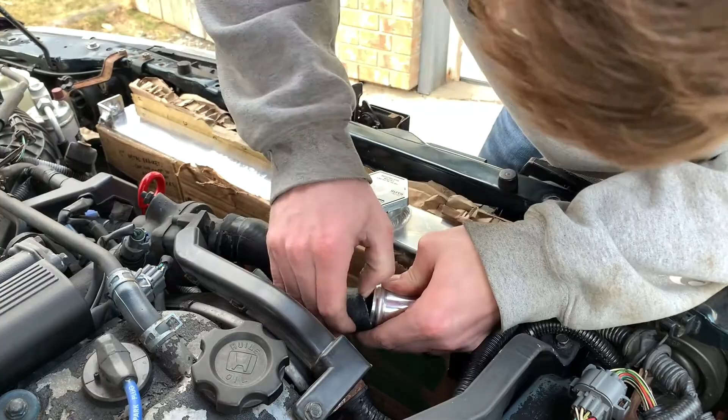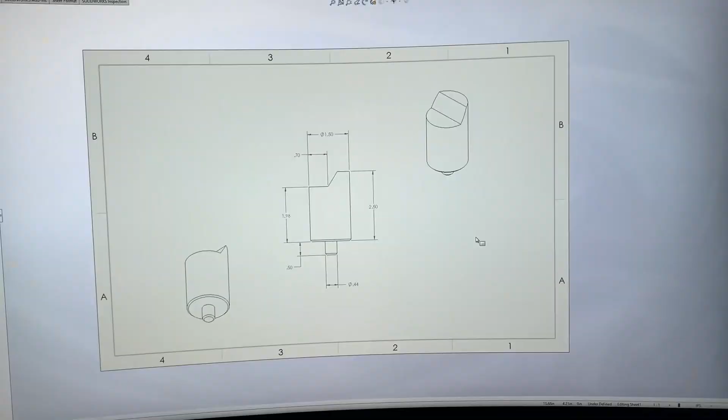Basically I have to relocate these mounting pins, and this needs to be spaced. So I'm going to try and draw up some spacers that will get welded onto here, and then we'll just mill those down to fit in the rubber bushing. Got a basic drawing just to communicate the idea behind my mount. So we're going to make that.

What's up guys, finally we're getting some super nice days here. I just finished work, heading back over to the shop. I'm gonna finish up doing those lower mounts on the rad, hopefully today, and then we'll continue with putting it back into the car.

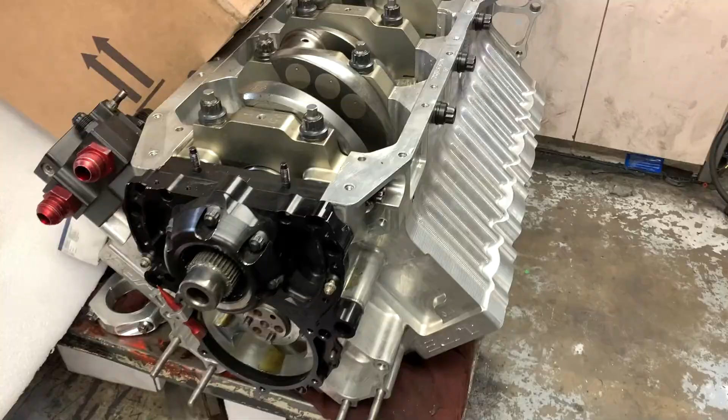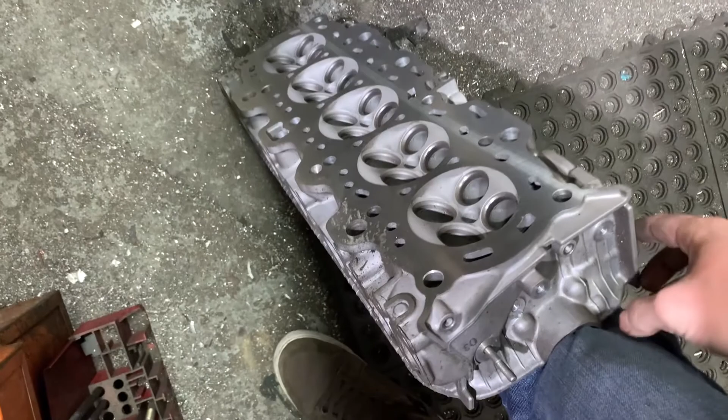Right here, still have an old head. I never realized that one was just a 5-cylinder. I decked it, yeah, but never did the valves or anything. I was going to swap it on my current vehicle, but did not, so it will remain here another while.

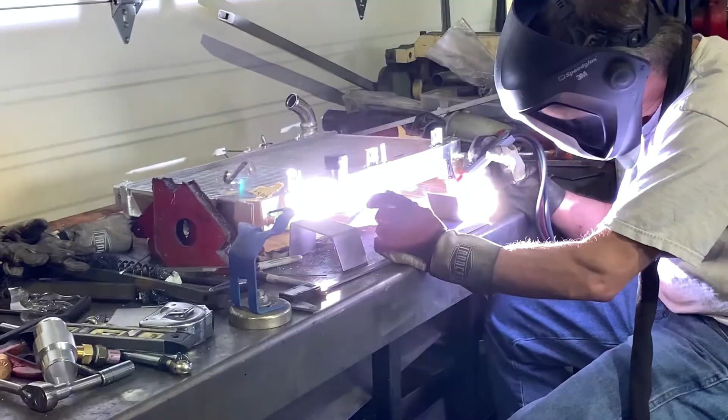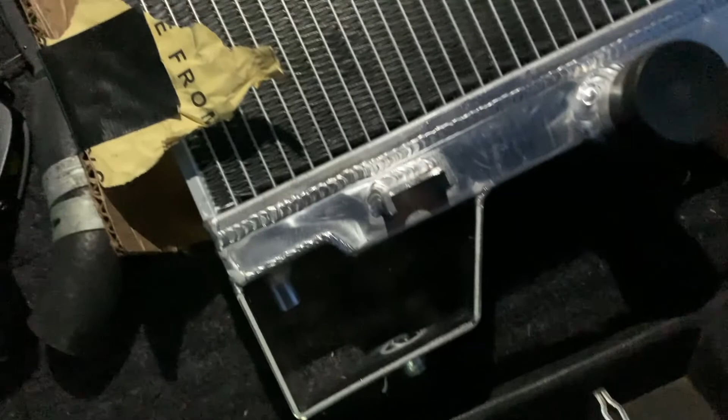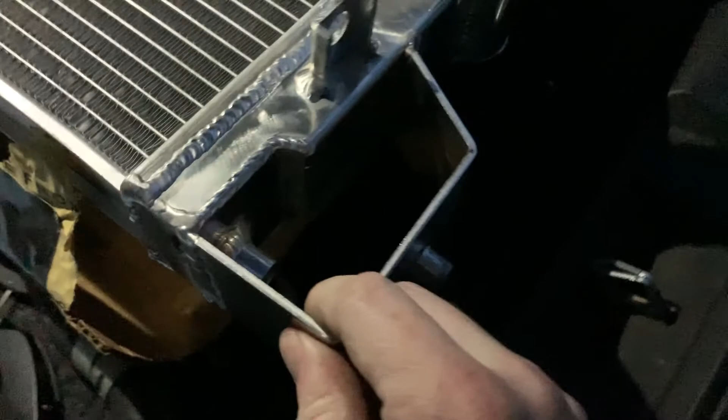So Curtis told me my idea was stupid, and we did this instead. Basically just much sturdier and was much easier to weld these brackets on instead, and then put the locating pins on there. So those pins I am going to test fit now, and this should be the last test fit to see if it works and if it lines up with my stock locating points.

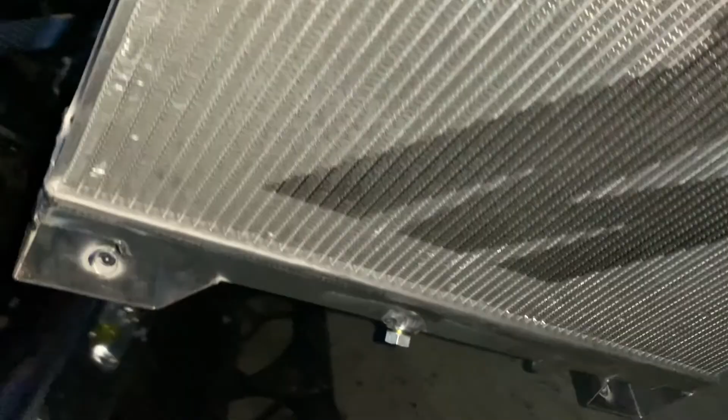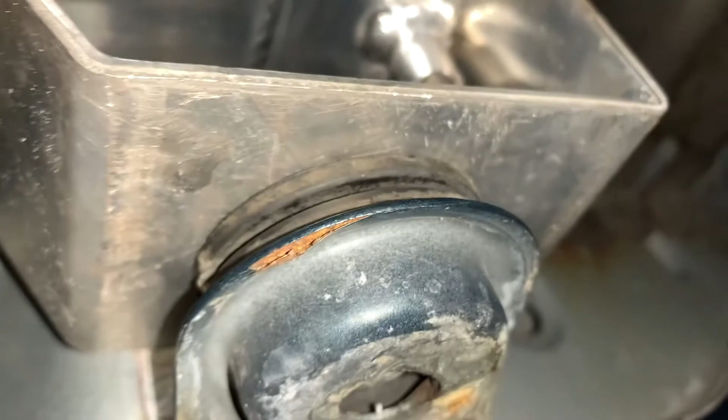All right, let's see. Success, very nice fitment. Fits into the factory mounting points.

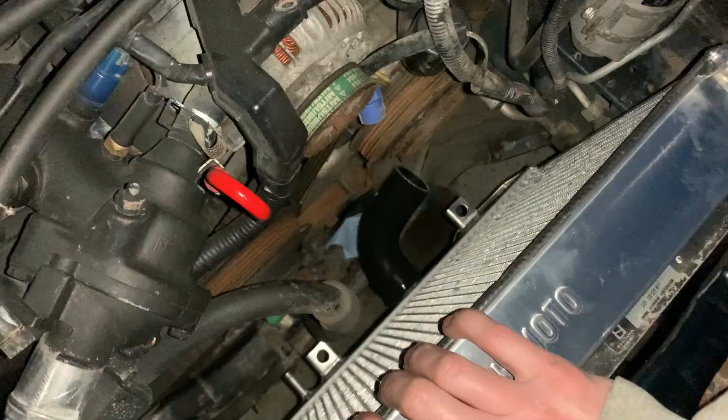So the only thing left is to drop by the shop tomorrow and pick up my last two pieces. Curtis is going to weld up 2 hose reduction fittings so that I can go from this 1.5 inch down to the 1.25 inch to match up with my stock rad hose, so that at least I can still utilize that piece that's tucked all the way back in there. So I'll have one of those there, one of those here, and my factory temp sensor will get remounted onto the reduction fitting as well.

So we'll do that tomorrow. Tomorrow, we're gonna cut these brackets and get my 2 hose reduction fittings from Curtis, and then it should all be able to go in tonight. So let's go do that.

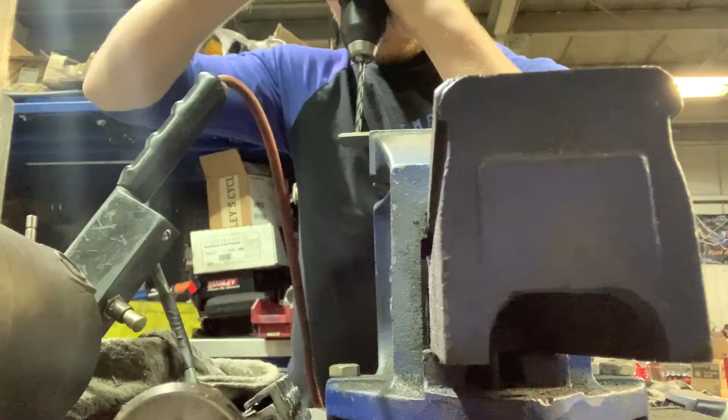Alright guys, just finished up the brackets and the reducer, the hose reducer fittings, and I think we're good to go. I think I got everything that I need now, so we're gonna head back to the house and put this thing together.

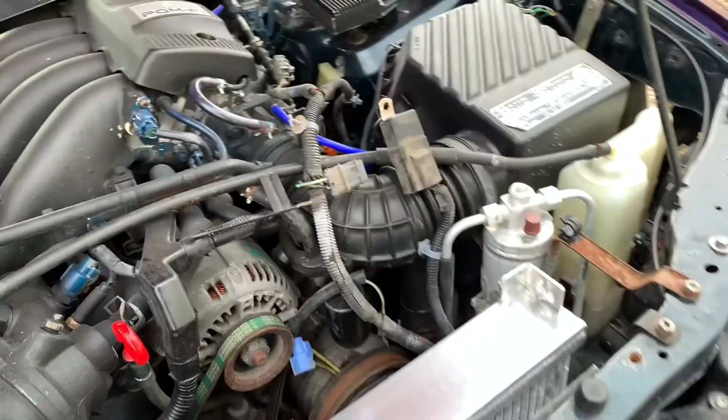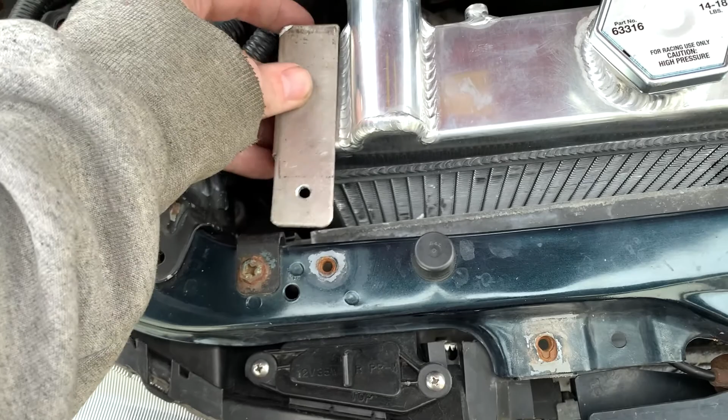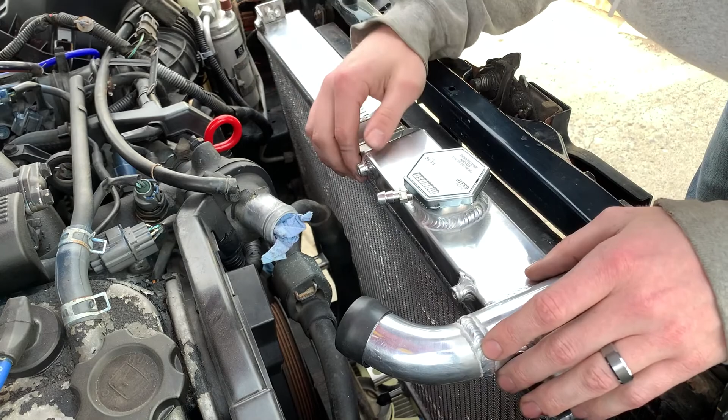So my two brackets, basically one will go here, and the other one with this sexy corner will go just exactly like that. So I'll just get most of my hose stuff set up, then I'll pull this out, I'll mount my fans, wire in the plugs, and then throw it all back together.

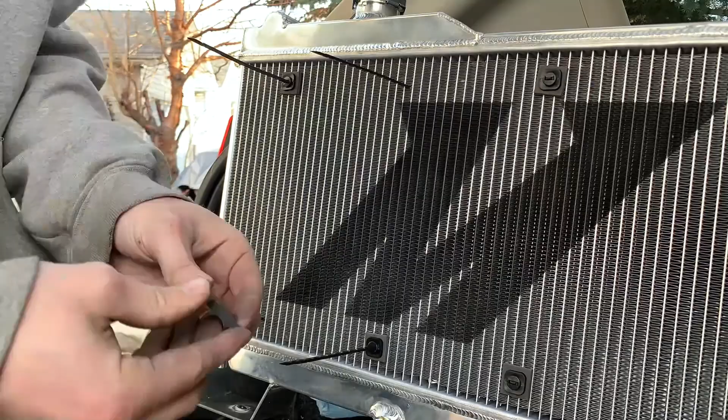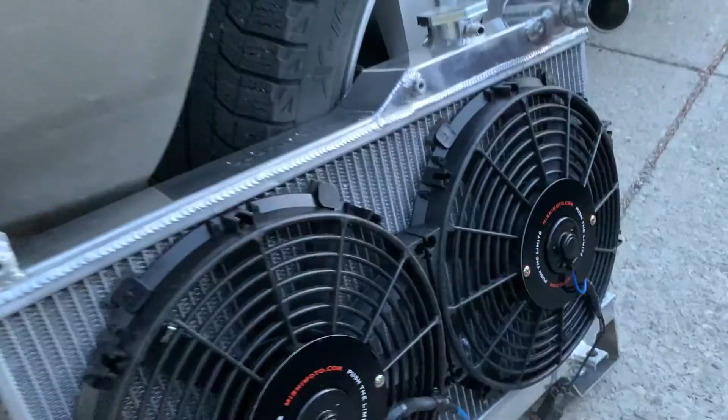Got those plugs wired on now, and we can throw that in now. Finally!

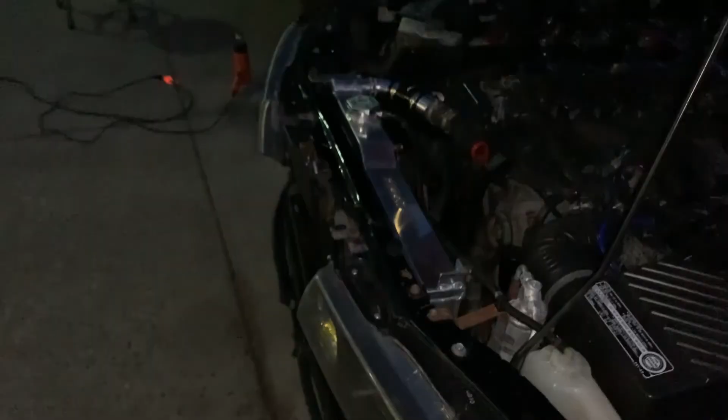I want to see mountains again, Gandalf.

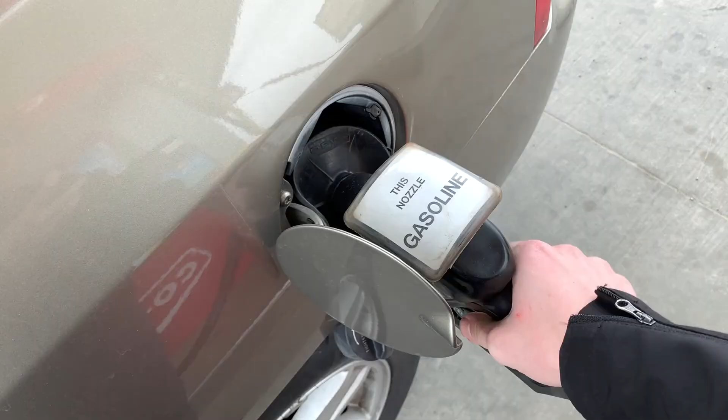Okay, so we're on like day 5 now, day 6 now. I don't know, I'm beginning to lose track of how many days I've been working on this thing. It's a pretty long project just because of working during the week for one, and then having to fab all that stuff for two. Last night I got everything all mounted in the car and hooked up.

I'm gonna probably try and fill the system now and start it up, run it, and make sure nothing's leaking. And then if that's all good, I'll zip tie the cables up. Then I will throw my front bumper back on, go to the car wash, and wrap this thing up, for this video anyway. Then we'll have more to come.

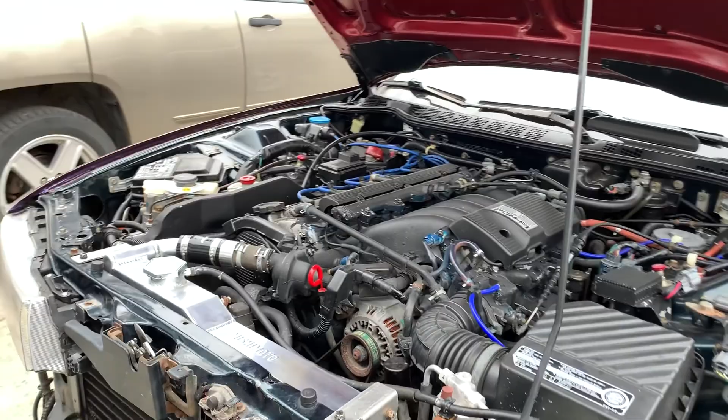No! God, please, no! No!

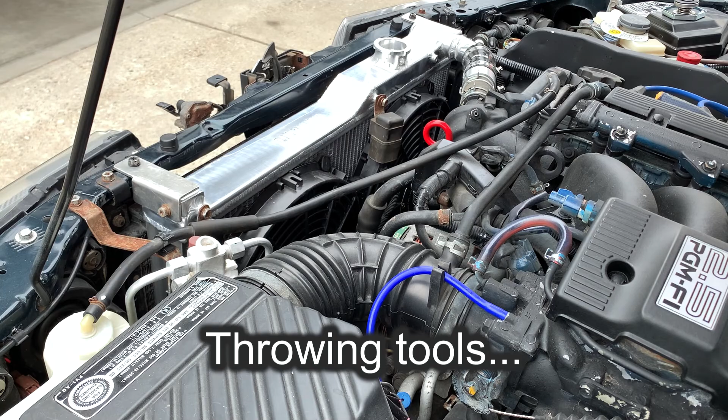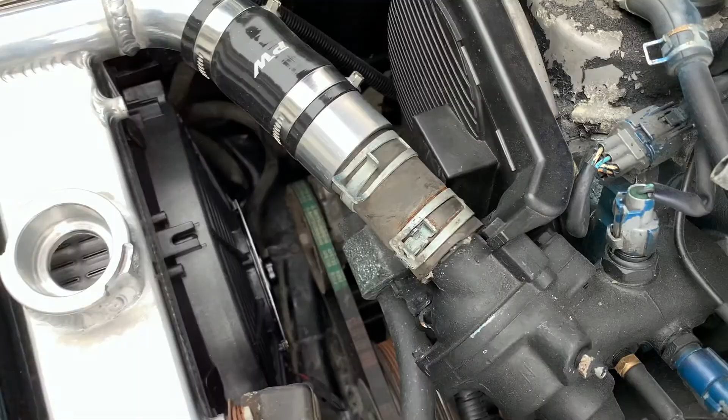Well, just screwed myself there. Oh my god. Literally just was trying to tighten this thing a little bit, and it twisted right off. So now the inside of it is still threaded in there. I don't know how I'm gonna get that out.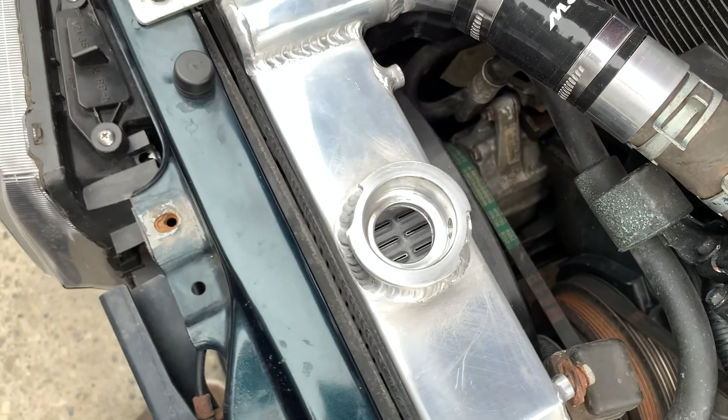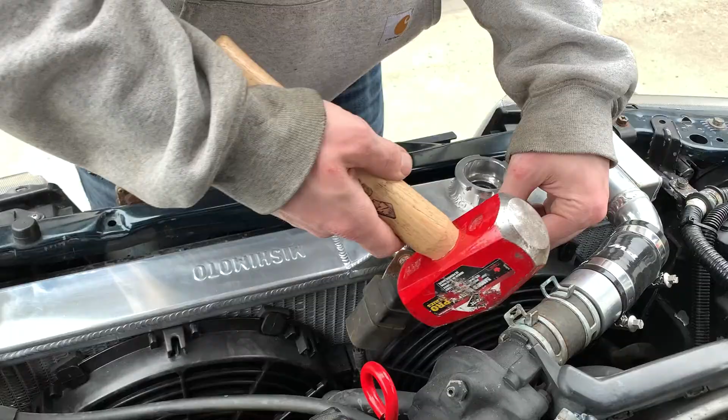Nice, and I was literally just about to put coolant in it. Right on. This might actually work. I was so close to being done.

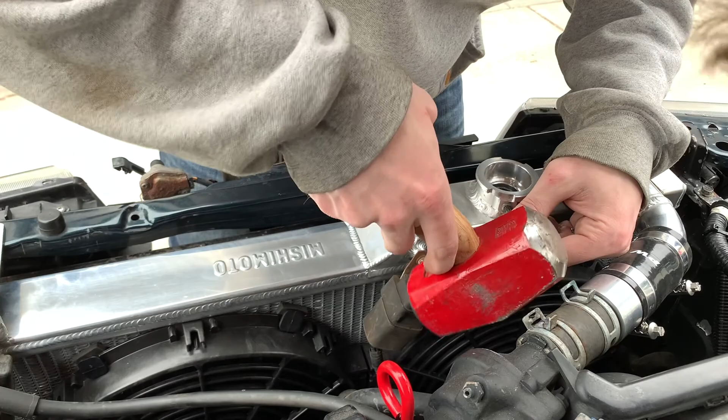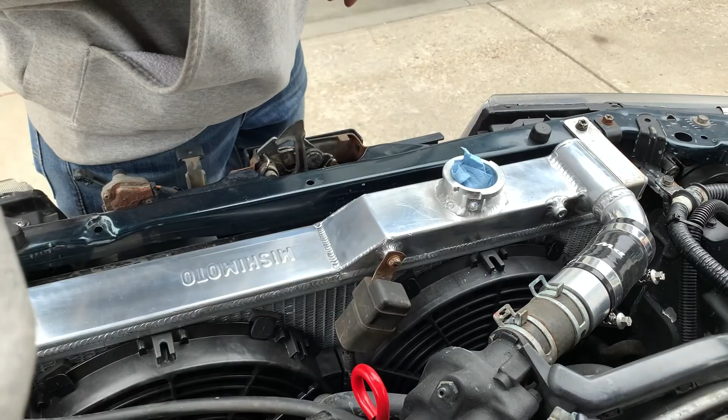Well, I'll just go get another fitting, see if I can drill and tap it. Probably this guy should end up working. Hopefully I just don't have to mess around for an hour trying to drill and re-tap these threads. So we shall see how that goes.

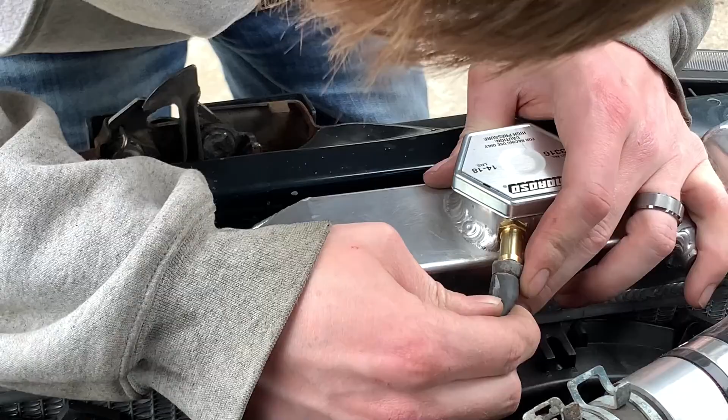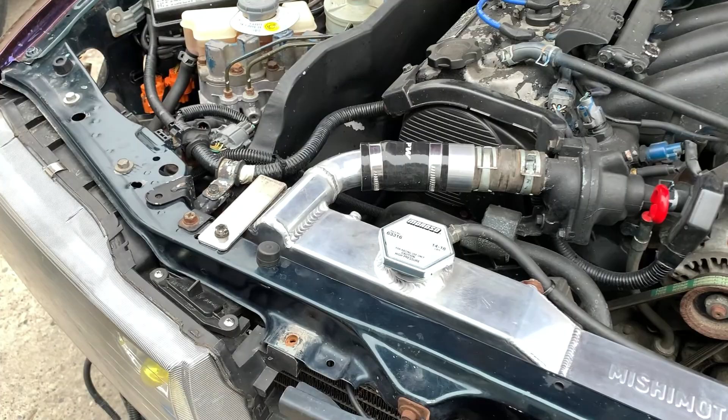Alright, well that was a mess around. So now that we're done with that, we are going to fill the system. And then we'll see if we're all good.

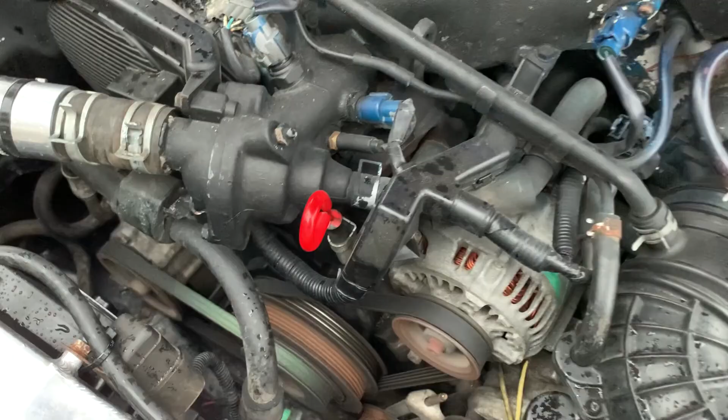Don't mind the rest of my gross engine. I'm not seeing any leaks, so that's good.

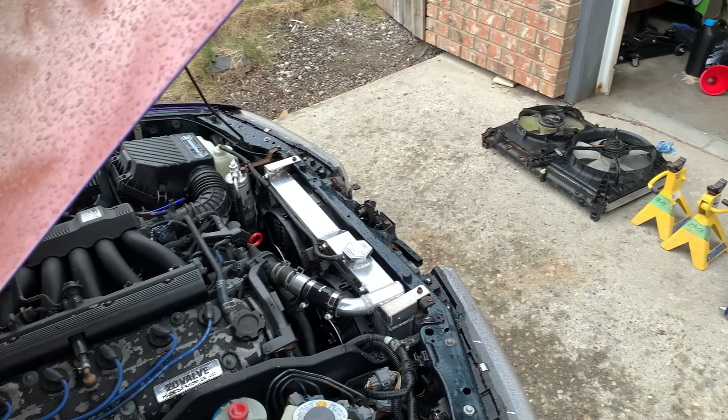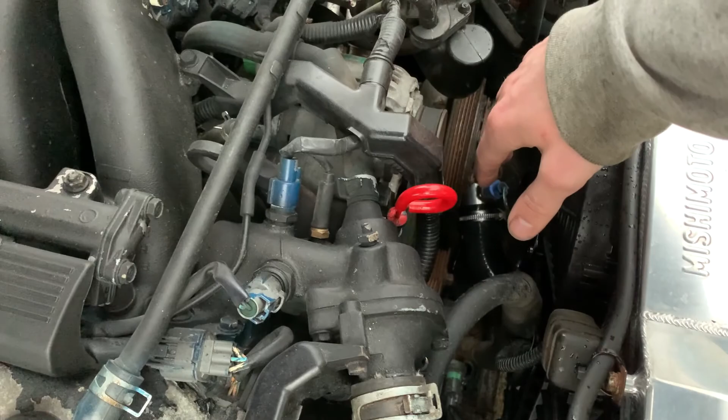Fans kicked in. Those fans go hard. Oh, that's good, they work. Fans are a little bit aggressive, but I'm actually amazed, they literally turn on for like 5-10 seconds and I can feel the air go from hot to cold in that time. Pretty crazy. So looks like we're in business.

Finally got this thing all done. Probably just gonna throw the bumper on, take it for a drive, and then we'll end the video.

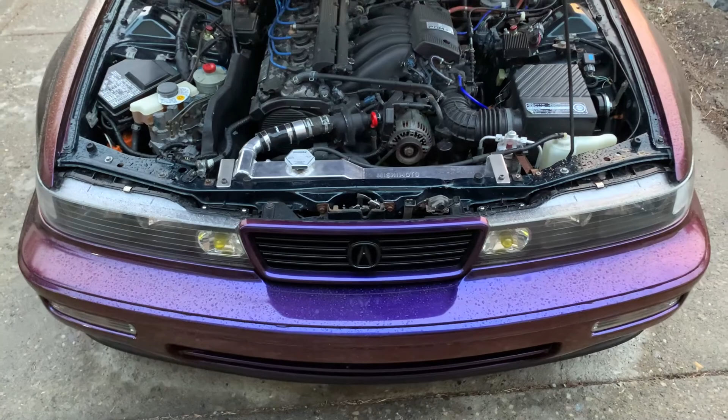Alright guys, well that's it. Now I'm ready for driven with a day to spare. Was a little bit stressful there. That's it, it's back up and running. All good.